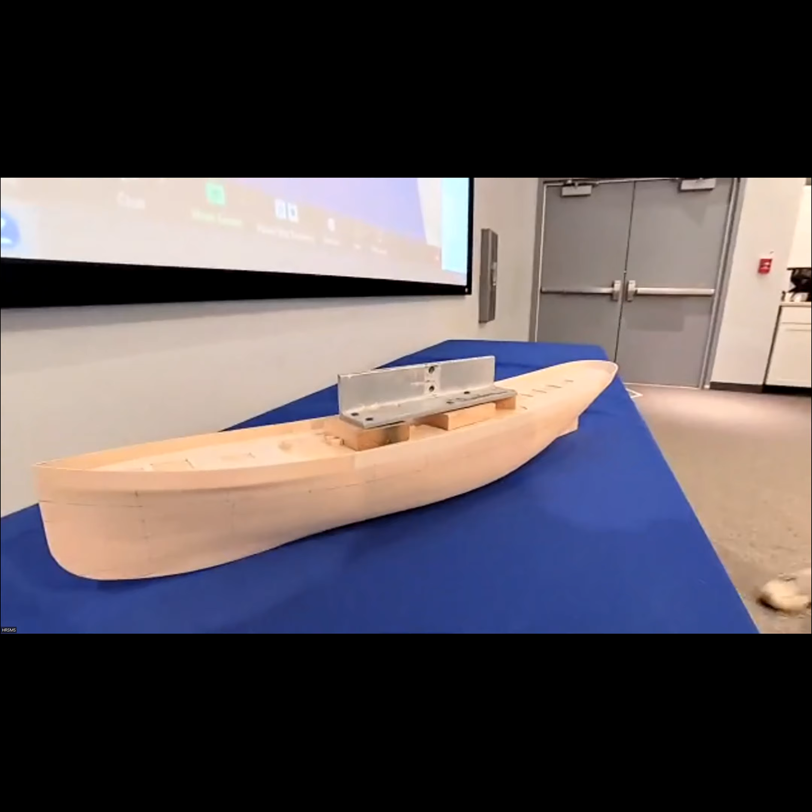pilot boat to John Estill. I usually have that camera set up pointing to the room, the other one has more adjustments. Well, I think I got it pretty good. But at the time, I had just put the roughed-in pieces for the bulwarks, and it was a sight, wood hanging all over the place and squared off.

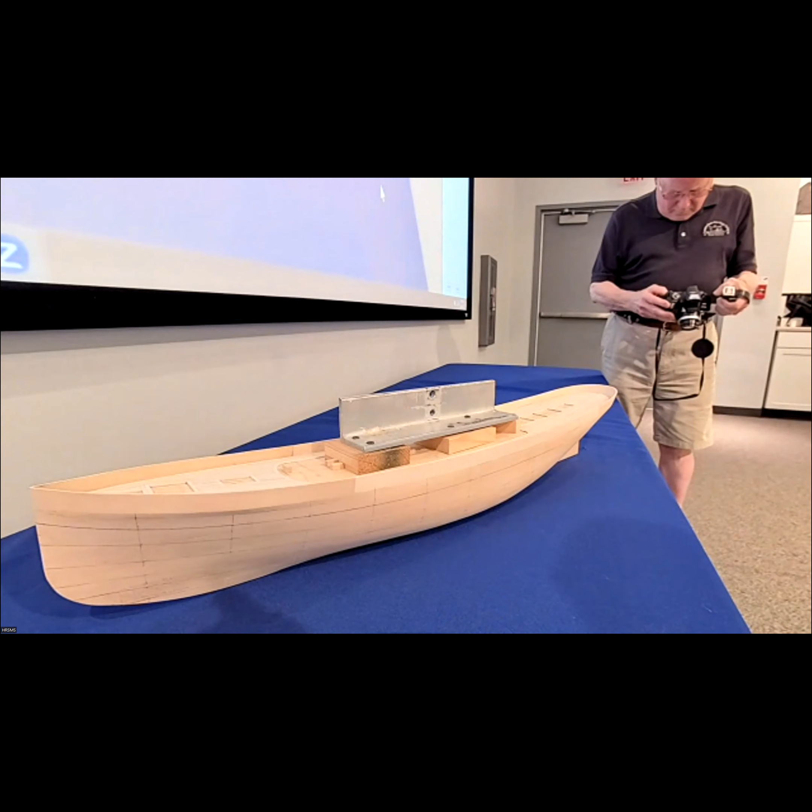But from last month to this month, I was able to finish the bulwarks, cut them down to the right height here. And the two pieces at the stern, port and starboard, were fitted on as solid pieces and then carved to shape because of the types of curves and whatnot, because I didn't want any stress in the wood. So I put those on and carved them to shape.

Then, after that was done, I proceeded to lay off the straking lines for the plating. I started this project back in 2000 or 2001, by starting to put the data together to see if there was enough information to build the model. And I found enough, obviously.

One of the pieces of information is the museum here has the plating half model that was made for building the original ship. The ship was built down at Newport News Shipbuilding. This is their hull number 12, something like 1892, I'm not sure about the date.

Anyway, I took the information off of that plating model for the strake runs and everything. And in the ensuing 23 years since I took that information off—actually, take it back, I did the research in about '96. So it's almost 30 years old information.

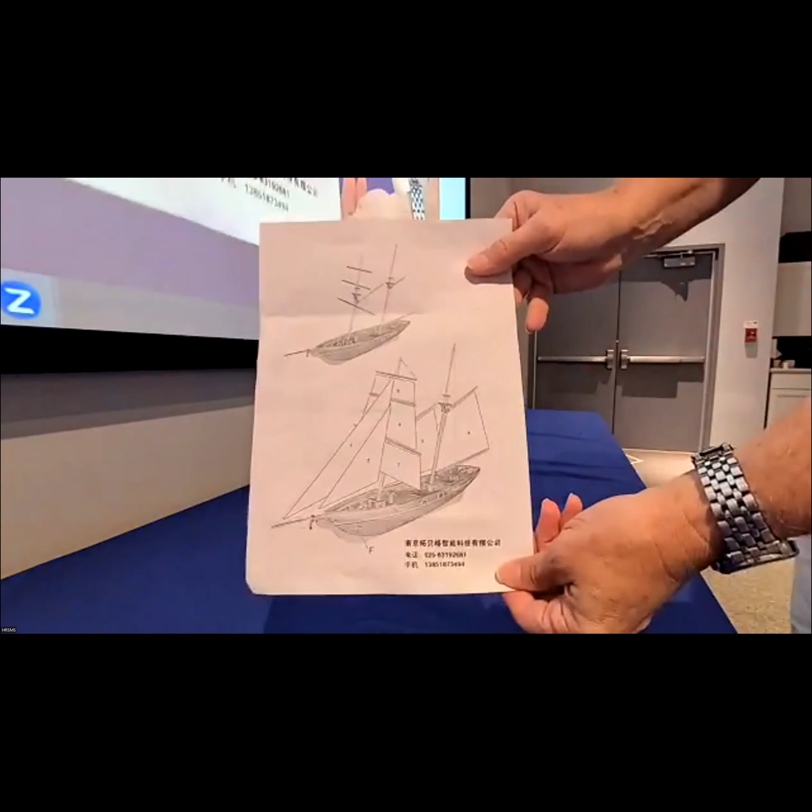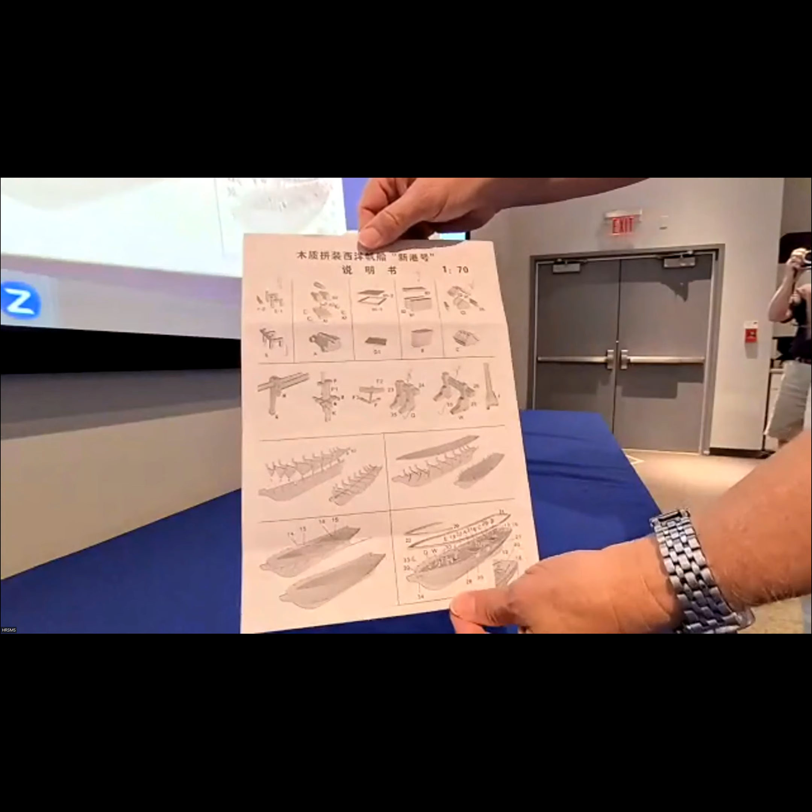Ed, can you bring this up so it'll be on the screen? There we are, there's the overall view. And here is the IKEA step-by-step instructions, all annotated in Mandarin, I assume. And, well, here's the model he makes.

That is a nightmare. No, it's a pretty nice model. Looks like it, get right down to it.

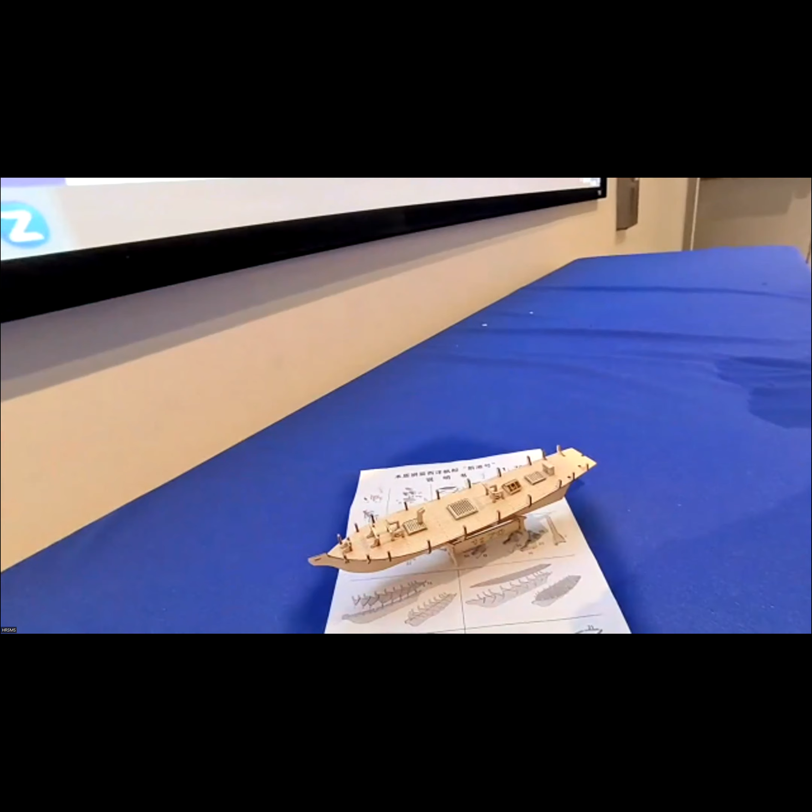If you use the Heinz Schiller method, just burn the plans and nobody can complain. There you go. Keep complaining about the various English or Chinese or Italian, the next one will be in Braille.

Yeah, there's the other side, that's the only thing I can do anymore. You have to think about that for a minute, don't you? In scale, 1 to 70, I don't know where you come up with that. It's a very common scale, very common scale.

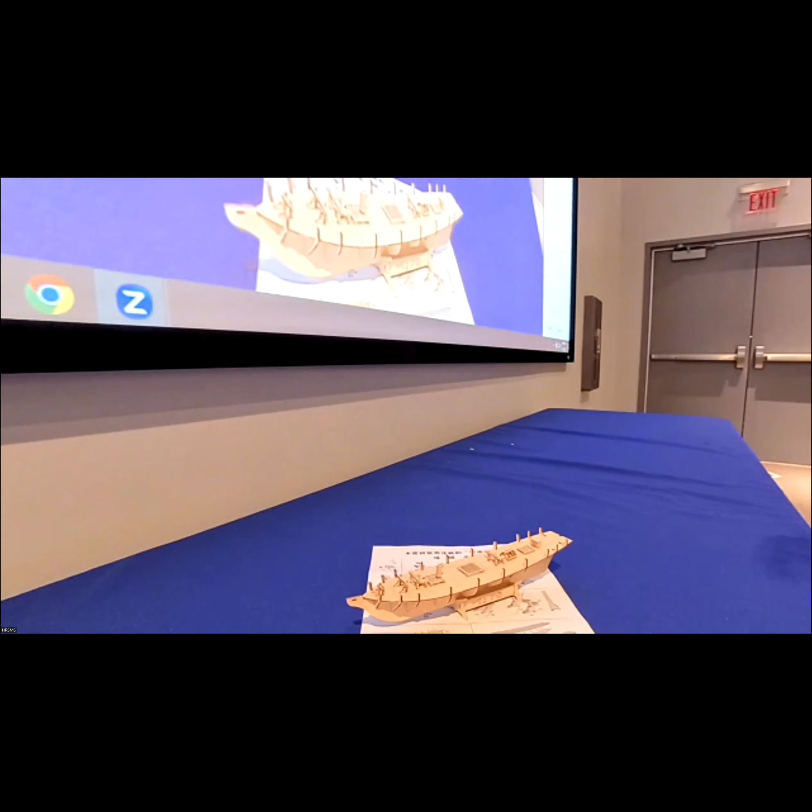What was that, Mort? That has to be plank, right? Yes, it won't float otherwise. That's kind of like the picture I saw on Facebook the other day of a gear shifter that had Braille where it said reverse 1, 2, 3, 4. I don't know why there'd be shift instructions in Braille.

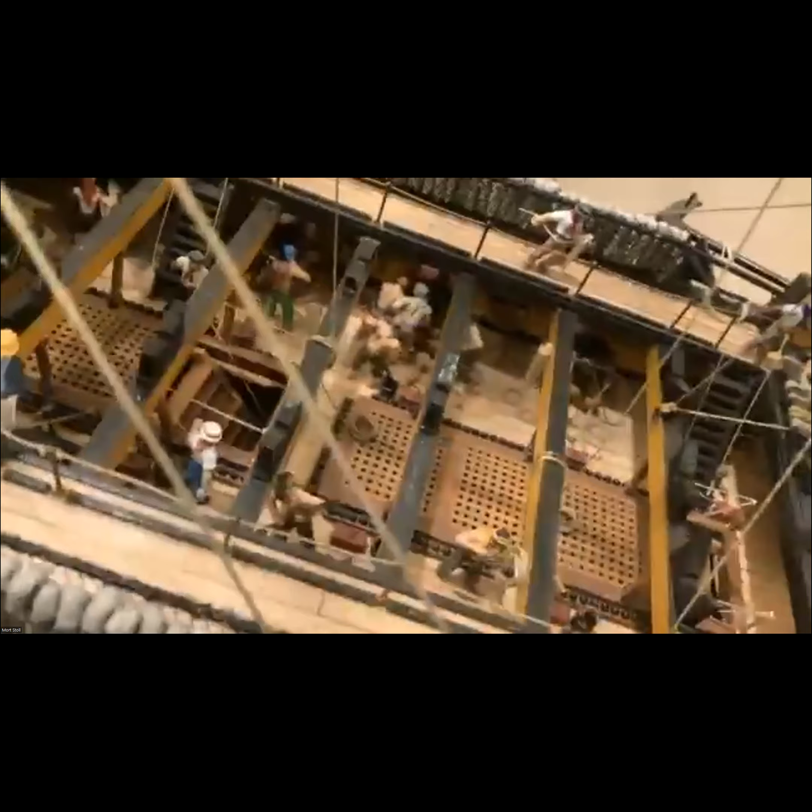I don't know if you can see, but I put about 40 figures on my ship, doing various chores and tasks around the ship. My only regret is that I didn't do it sooner, because the rigging lines blocked me from putting a lot more on. But it really opens up the ship and gives it a whole different dimension. It really brings it to life. I have a couple of pictures on my website on Model Ship World on the build. But it was amazing what it did.

Oh, he's got it, there he is. Marines guarding, you see, I put a couple of Marines on there also in front of the wardroom and in front of the Admiral's quarters. It was really nice, really great. It's a whole different dimension, it really brings the ship to life. You can see it from Gene's destroyer escort more so than this. Oh, we can see quite a few figures there. It looks great, thank you.

I put about 40 figures on. I would have put more on, but I couldn't get into some of the nooks and crannies because of the rigging lines.

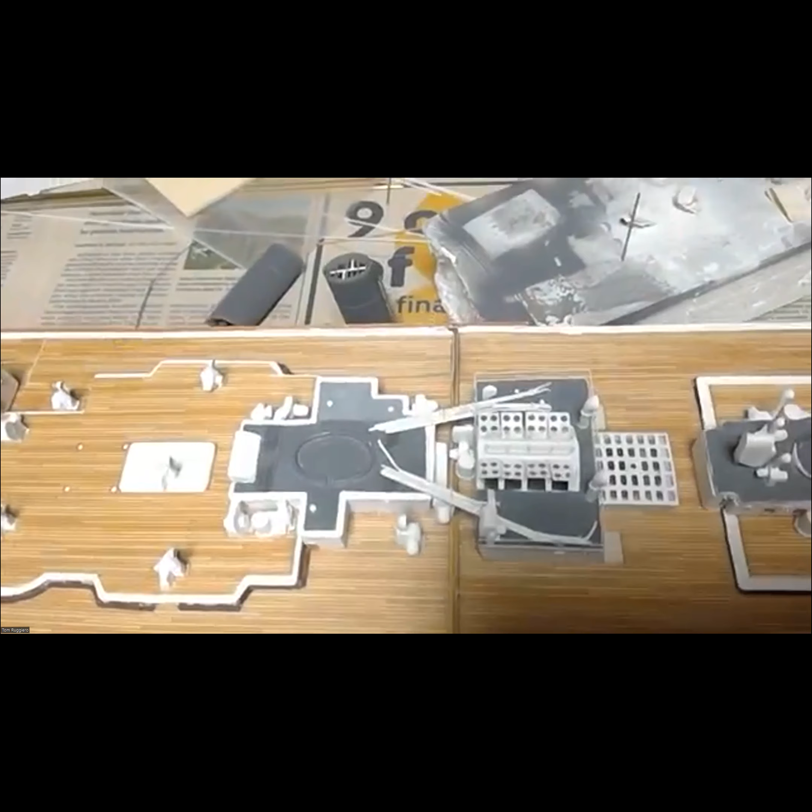So anyway, this is the base of stack 3. All of that is piping, hot and cold water piping that comes out of the tank room and goes into the number three funnel. I'm gonna try not to break it, I already broke one set. Let's do it this way, it's easier.

Okay, right there—those are the 3D funnels. And if you notice, they're pretty good. They're actually very good. They've got all of the plate lines on them, they even got the rivet heads on them. And this is 1 to 350 scale. So that's pretty incredible, and those go on next.

So in preparation for doing that, each funnel had 12 guy wires that went down to the deck, and I'm trying to figure out how I'm going to do it in 1 to 350 scale. I don't even know if you could see this on the camera. Maybe over here you can.

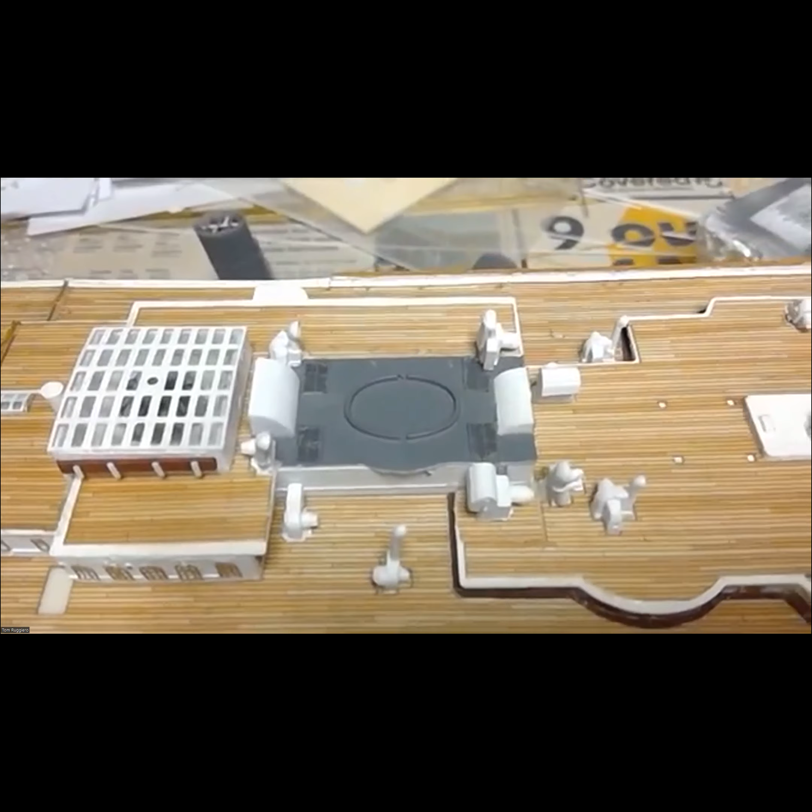What's going to happen is these guy wires are roughly 0.003 in diameter, okay, 1.25 inches. They were galvanized wire cable, and they were tied off at the deck by hemp coils. So what I'm going to do is, on the funnel end, because I'll never be able to get eye bolts in this scale or make eye bolts in this scale convincingly and consistently, what I'm going to do is drill holes in the funnels.

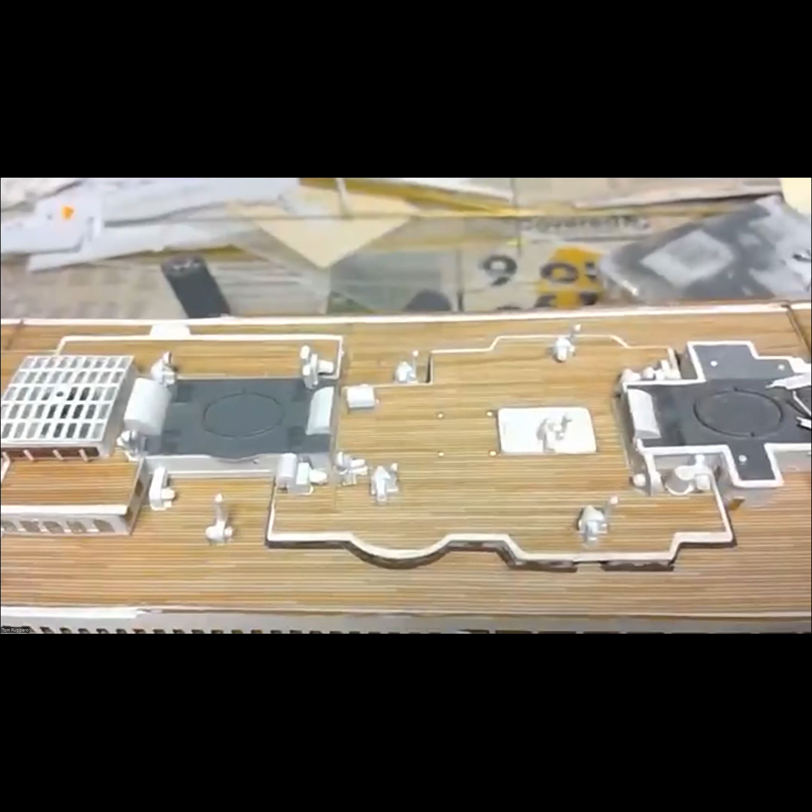I spoke to Gene about this. I'm drilling holes in the funnel, and I got one that I started. I don't even know if you could see it—we'll try it down here. I'll put it on white paper so maybe you could see it. There you go.

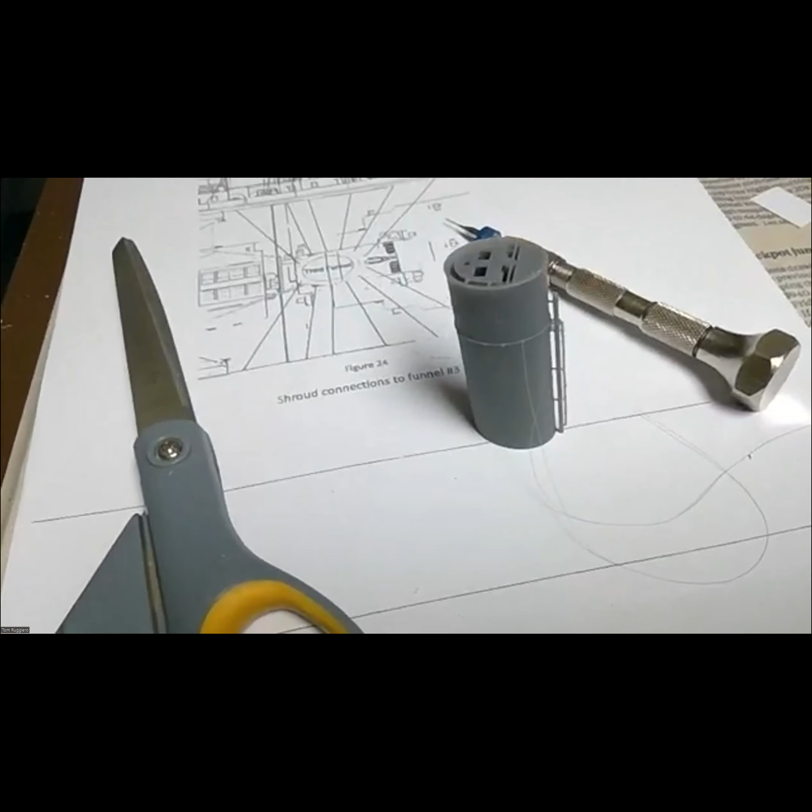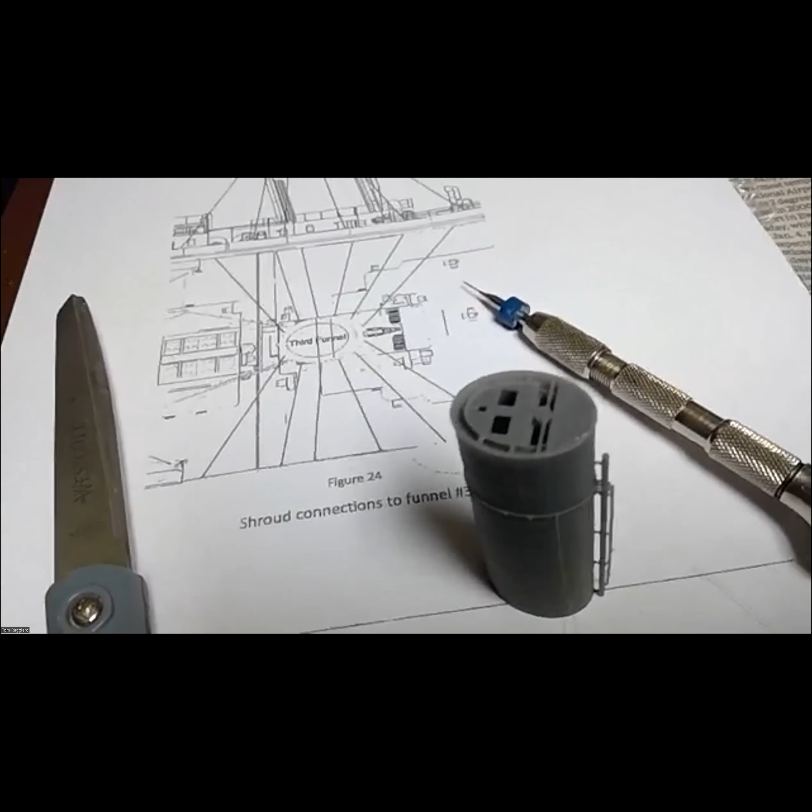You see that funnel next to the scissor and the pin vise? You notice those little gray wires? So what I did is I basically drilled number 78 holes in the funnel where the eye bolts would be, and then I pointed the 8/0 fly tying thread with cyano. When it dried, I stuck it in the hole, and then I backed it up with some more cyano. So now you could see that what is effectively gray human hair becomes the guy wires, right?

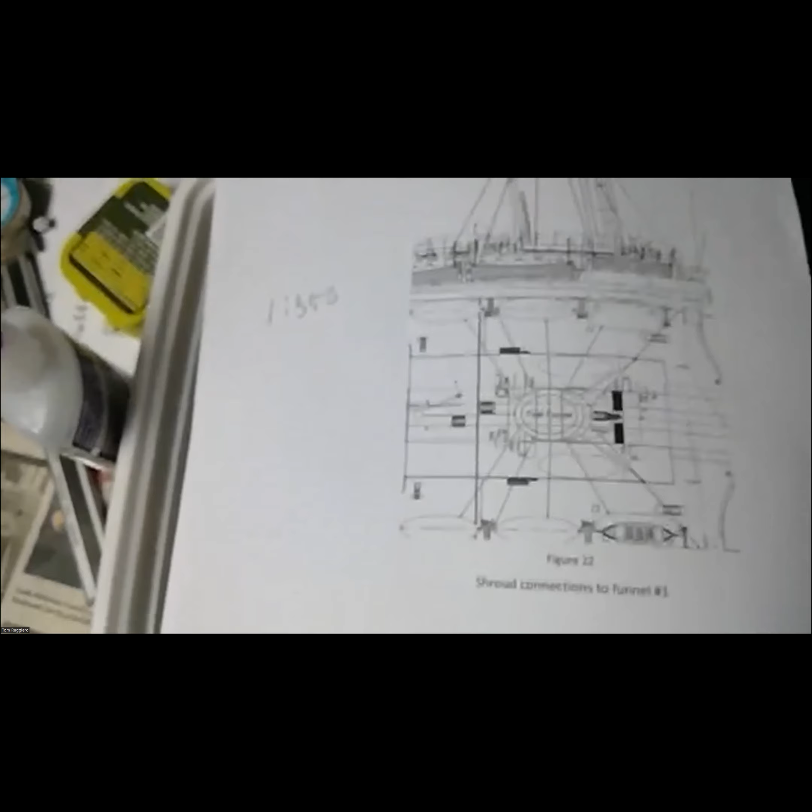And then when it comes down to the deck, I'm making these coils out of 10 wire—what they are is just a looped coil, it's knotted—and I'm drilling holes in the deck. And what I'm using is the research that was done by Dr. Reed. Okay, and this is the research that he gave, and you notice it shows where all the guy wires go to the deck. So I'm using that as a plan to drill the holes for the bottom of the guy wires.

And then I'm putting these loops in the holes, and sticking the knot through the hole and backing it up with cyano. And then when I put the funnel on and I'm attaching, I'll just knot the guy wire through this loop that's now on the deck. And when I tighten it, when I snug it up, it'll look like a rope coil. And it took me a while to figure out how to do this consistently.

The coils were driving me nuts because I was experimenting with different size holes, because what you have to do with these coils is cut off the knots flush, and then make the hole big enough that you could slide the knot through the hole, and then back it up with cyano to plug it in there. And we'll see how it works.

Hopefully next week I'm going to be able to paint the funnels, and once I paint the funnels I could start putting them on. But before I do any of that—because I've already knocked off a few pieces and had to put them back on already—Dr. Reed's research paper also tells you where all of the landing points, all of the belaying points are for the shrouds and all of the standing rigging. So I'm going to make the holes and put the loops in for the standing rigging before I do anything else, because once the funnels go on and the guy wires are on, it's going to be like rigging a regular ship, and anybody who does wooden models knows how much fun that can be.

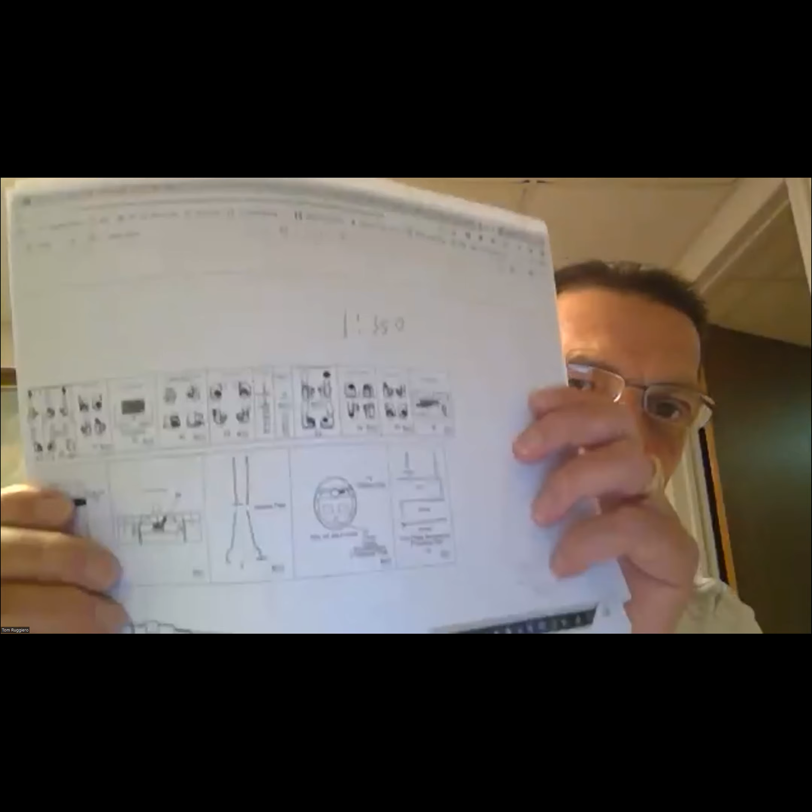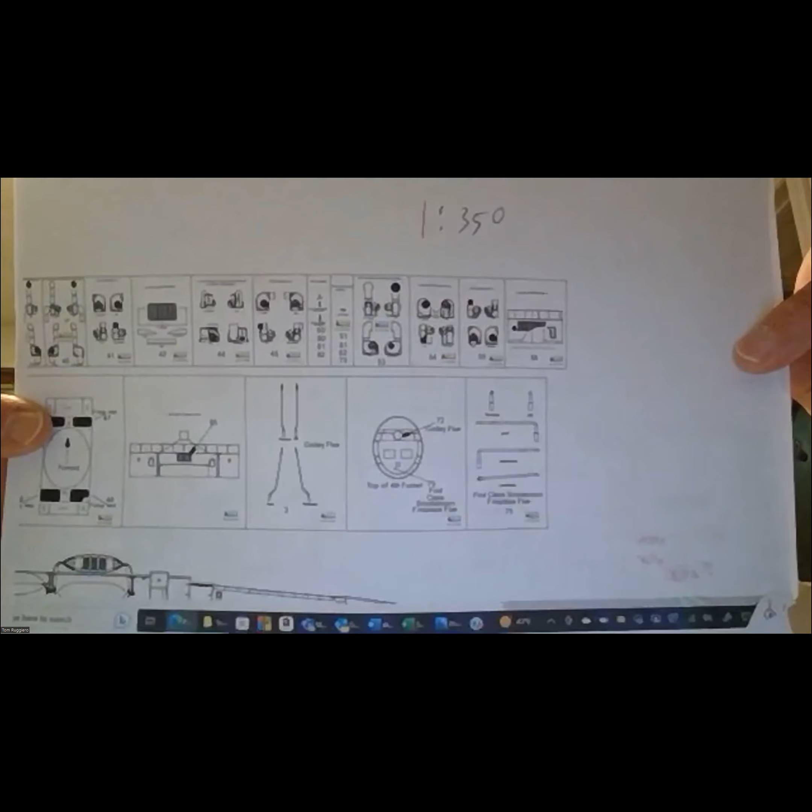I know the person I'm building this model for won't know the difference, but the kit parts, first of all, they're clunky, mostly overscale. Number two, they're all identical. These cowl vents, there were identical ones in the kit, but there were some that were a lot different from each other in reality.

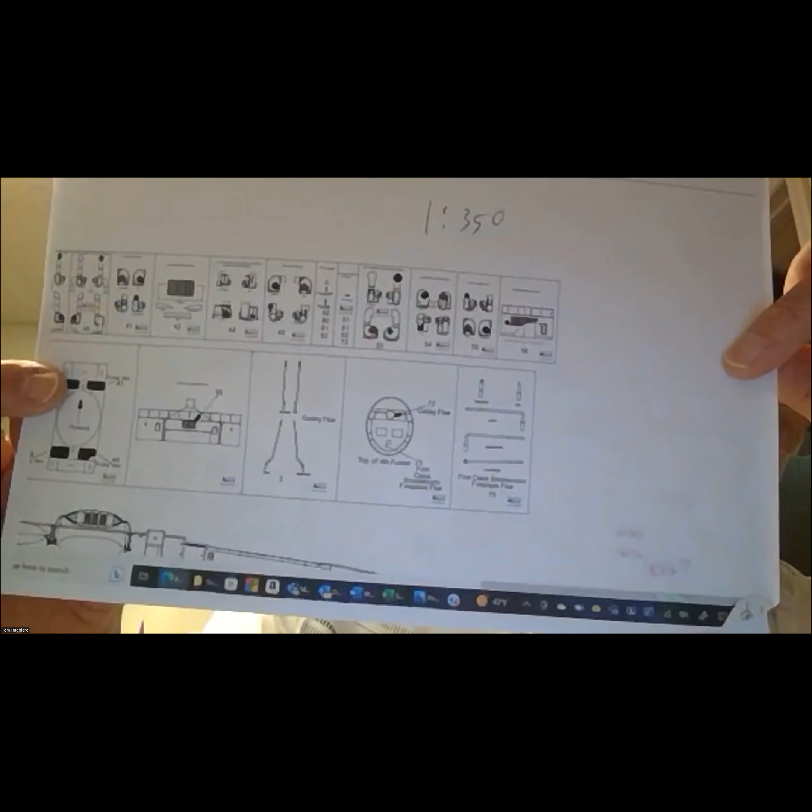For example, it came with precast fittings on the base of the number 4 stack that I just cut off because they were all completely wrong. And I scratch built the replacements.

If you're into this stuff, the amount of research available is beyond belief. So when you search for the website, the CAD Plans website, he had to change it because the server owner changed and he lost his original website, so he had to rebuild it. It's still Titanic CAD Plans, used to be .com, that went away, now I think it's .web, I think he changed it to.

Is he a modeler or is he more of a historian? He's a dentist, but other than that, I don't know.

All right, thank you, Tom. You're welcome, guys. Joe, do you have anything you want to talk about or show us?

Nothing as elaborate as Tom's work, but I can show you what I've done with Cheerful. Slow but sure coming. I'm going to share my screen. Go ahead.

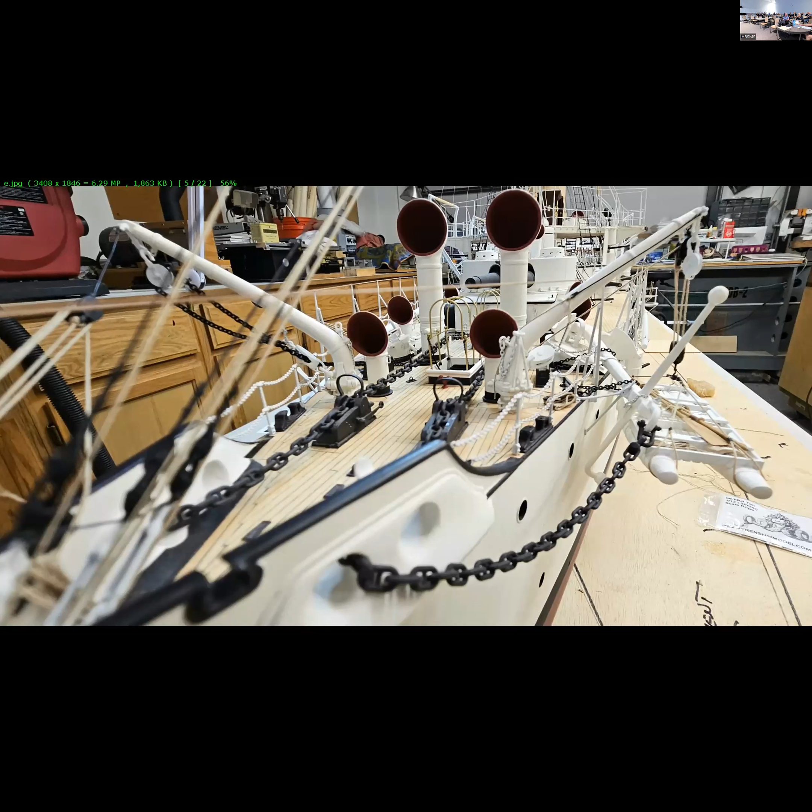Here's a closer up of the forecastle area. There—what is that? We'll find it. Well, not yet.

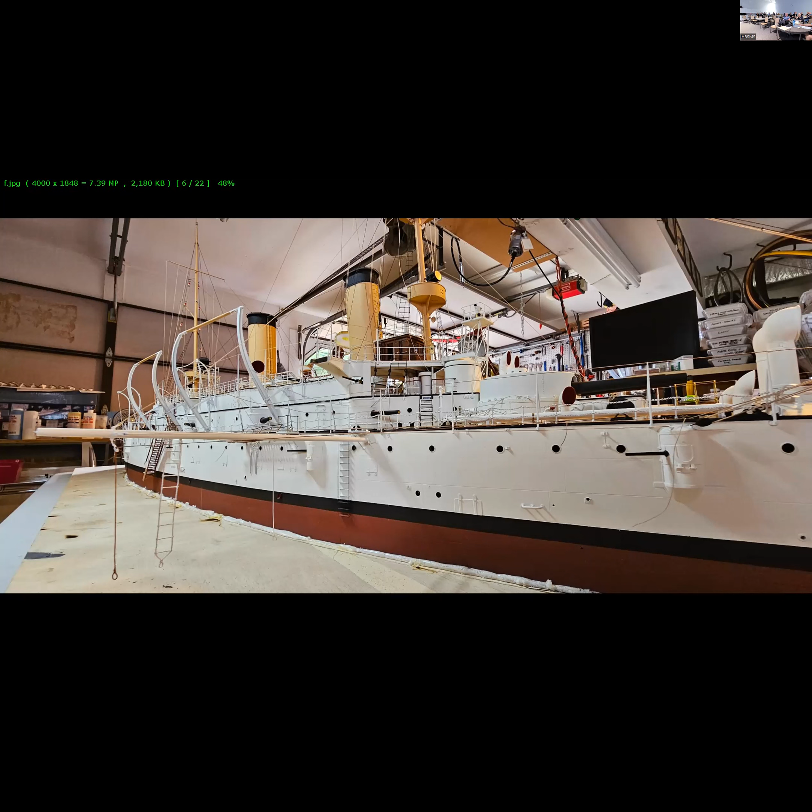And here's one of the outrigger booms for the boats. The model's going to be configured in water. I have it now permanently anchored to the sub deck, and then from here I'll build up insulation foam, maybe another 3/4 inch to bring it closer to the water line, and that will be the foundation of the water effects, and I'll build it from there.

So lots of rigging, I'm about halfway through with the rigging at this point. Oh, lots of strings.

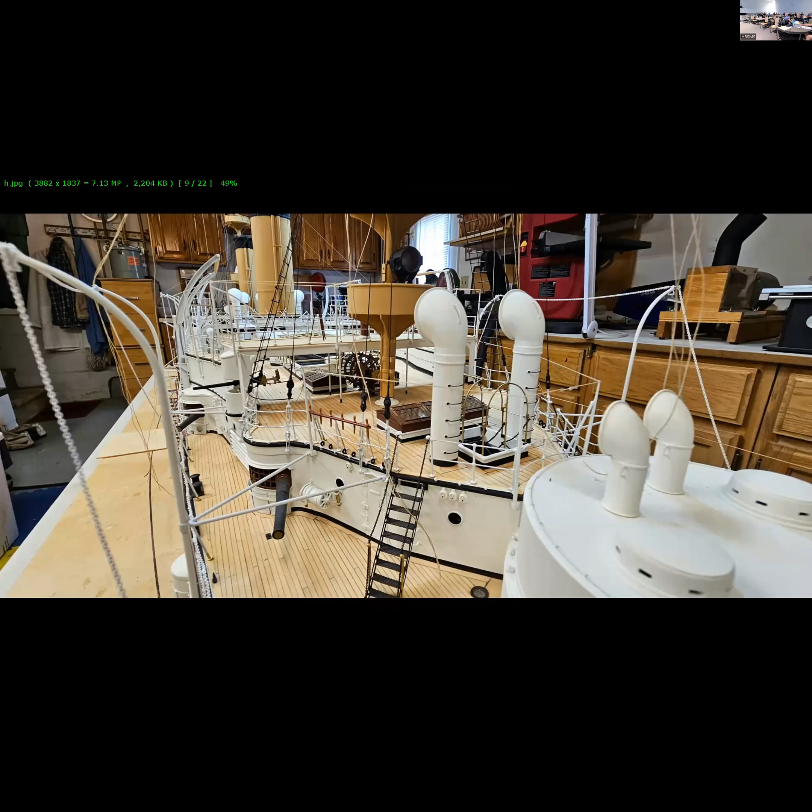Here's a nice wide back view. Got a new phone and it has a wide angle lens on it.

Trick is getting the phone out of the boat once you drop it in there. That's an interesting picture of the accommodation ladders with its associated rigging and work.

From here, I moved on to making, oh yeah, here's a little bit - what is it, flag hooks, things etched in brass. They're probably about, I don't know, an inch or smaller.

I had to go make some lights, turned out of acrylic rod and outfitted in brass. The way I did that will come up shortly. These are the NUC lights, which I queried John about - pictured but with no more information than a basic shape. Color was derived from conjecture; modern ships had a dual red and clear light arrangement, so I figured these were probably the same, since NUC lights were either red or white, generally. They were hoisted up the mast and the associated rigging.

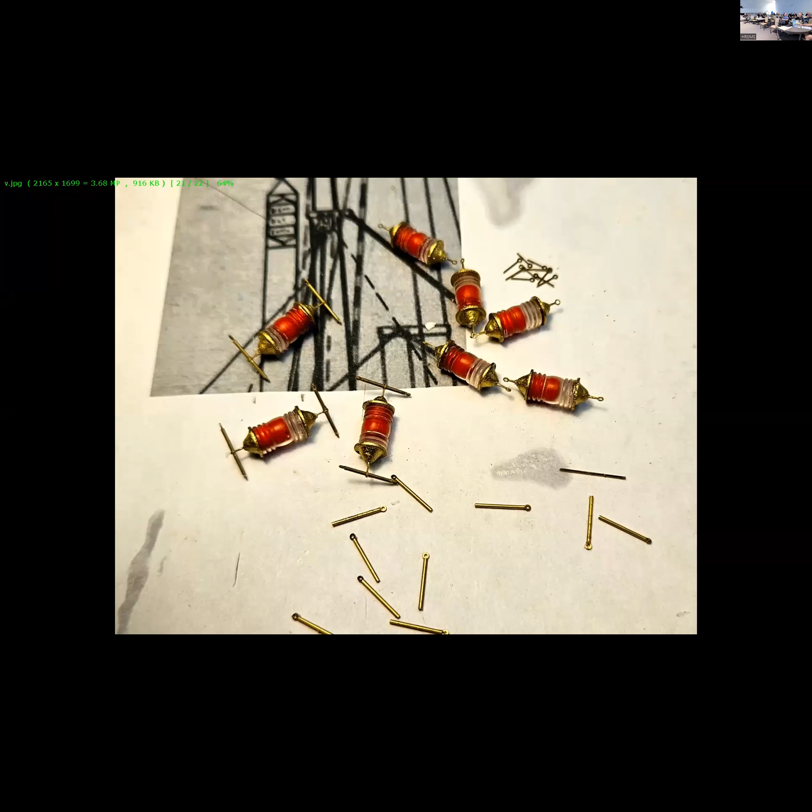I dyed mine. There's the basic lamps with the tops and bottoms to them, and then I added some rigging components so I could hang them up in the rigging - and that's where they are now. There was an array of 8 lamps on the stern mast.

What are these used for, signaling? Yeah, they're not under-command lights like day shapes, but only for night use. I imagine they would have a variety of numbers of lamps lit, so forth. They're not to be confused with fighting lights, like more modern vessels have.

I don't think this... oh yeah, there it goes. Get it down, get it down. And that's it, that's all I got to say about that.

Is it an iPhone that you took pictures with? No, I got an Android. Yeah, they give a nice sharp image. Yes.

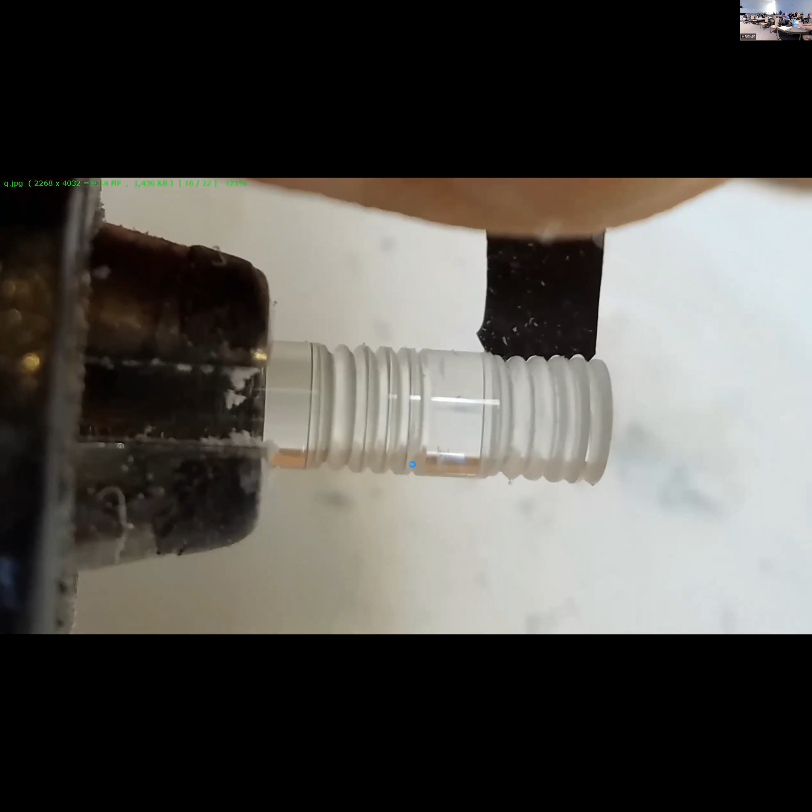I'd like to add one point that came to mind after my presentation last month. Another advantage of 3D printing is mass production - once you've got the rendering, you can knock out a billion of those. For example, like these lamps, once you get the first one done, you've got a million done in one, and they'll all be identical.

Once you carved the last piece of it, did you polish it? Not really, I didn't need to. It looks frosty there, but once you put a clear coat of clear acrylic paint on it, it just shines right back up.

Was the lathe running at slow speed? No, that's a hand drill, running at very slow speed. Yeah, I just chucked it with a clamp so I could run it fairly slow - but that's how that was made.

Very cool. The reason I asked about the color is I recently tried to find colored acrylic rod - you can't, but I got red and green. I bought some special tinted dye, and you can dye acrylic rod any color you want. I went with clear because I wanted a dual lens in the unit, the red part and then the clear part, so I drilled partially down through it and filled it with red paint to give that effect.